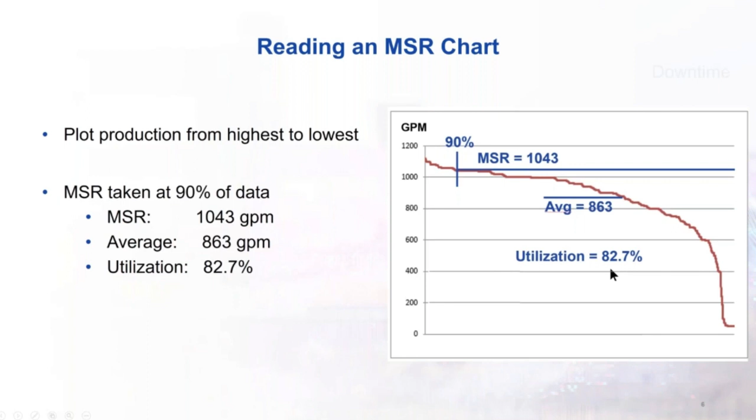And the goal is we're trying to make more production, so we need to take the part we haven't achieved and break it into two parts: there's a slowdown part and a downtime part. In this case, the slowdown part was 12.7% and the downtime was 4.6%. So as we come up with ideas for how we're going to increase production, we have to address one or the other of these to get the utilization up. You can get the utilization up by affecting those, or you can take the MSR up by doing a capital investment. So it's simple to do.

We've got a tool that will make the chart for you. You could build it by hand if you wanted, but for speed's sake and consistency, we have PARCview as a tool to do that.

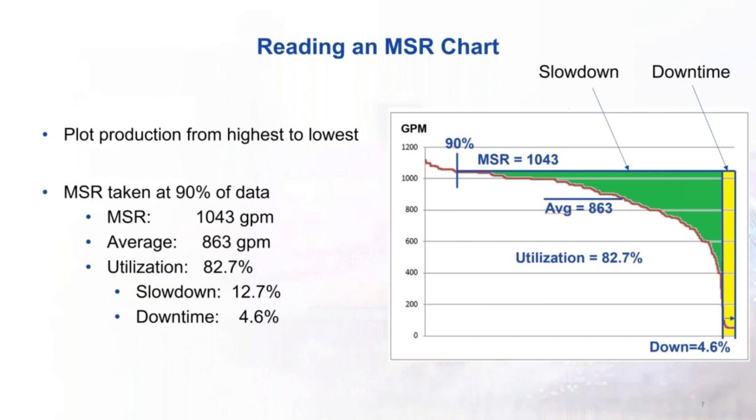So why use MSR? The goal is to increase the capacity of the entire plant, not just one unit operation. We need to identify the capability of each one of the units. Here I'm showing 8 units, and I'm showing the utilization level and the MSR for unit 3.

That's perhaps the slowest one in the plant. So we get the maximum rate and the utilization. Without using this technique, if you ask 3 people in the department, 3 different answers will come forth. You'll get it's amazing the range of what they believe they can do. You'll get one saying, oh yeah, on my grandson's birthday 3 years ago I came in at work and I ran 40, so the rate's 40.

And we just can't have those kind of guesses. We need to back it up with data, and the MSR chart provides that basis so each unit operation is evaluated the same way.

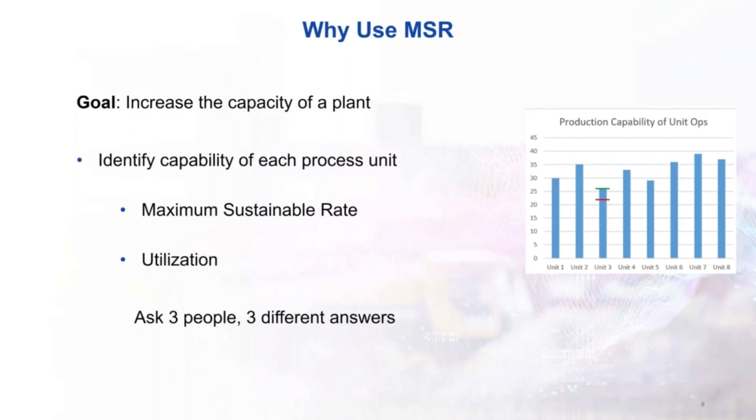So when we look at the utilization portion of it, how can we move the red bar up? We have slowdowns and we have shutdowns. Slowdowns, there are 4 possibilities. You have inventories low upstream, the people feeding you a feedstock, there isn't any, so you've got to slow down. Or the people downstream from you that you're providing feedstock to can't take it away, they're full up, and so you have to slow down. Or the utilities, the steam plant, the electrical, the delivery system, whatever, has problems getting you the resources you need. Those 3, you really can't do anything about yourself.

If you're trying to look at your process, the only one you can do anything about is if you have process problems. So under the slowdowns, we try to identify all the process problems you're having that's preventing you from getting that portion of the utilization.

Then on the downtime, there's 2 major types: planned and unplanned. And the unplanned downtime is either another unit got you, or you're responsible for that downtime. Again, the first 3 here, there's nothing you can do about those. That has to be under their purview.

But you can take the downtimes that you're experiencing and seeing through either preventive maintenance measures or something, if you can reduce your downtime. And that's to try to move the red one up.

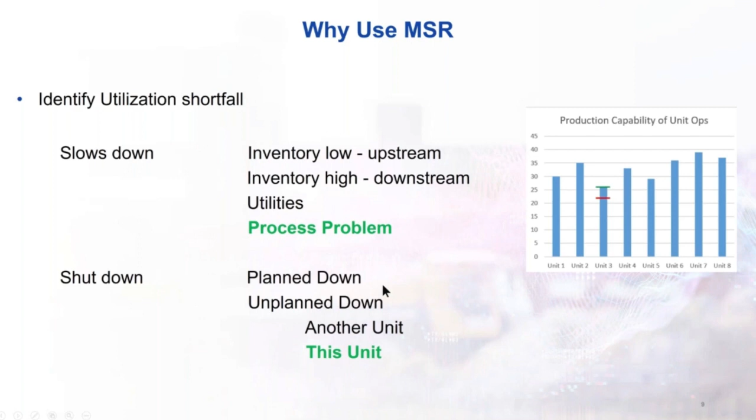So to take a look at how we go about doing that, what do we need to do the MSR analysis? We need the process unit production data for a year. We need somebody who knows something about the process, a subject matter expert, because when you start digging in and saying what can we do to move those up, it needs to really be somebody who knows the process.

If we're lucky, the plant will be recording reasons for slowdown and downtime, and we can use Pareto charts to organize those from top to bottom, what's the most important, what can we go after. And then you need tools that can do the identification of the downtime, help you find it, and you need tools to make sure that it's sustainable.

If you do move the bar, we need to be able to keep it there. We can't just do something and walk away. It's not going to stay there.

So what do you do with MSR data across multiple units? What you do is you find the limiting production, and I'm going to say it's unit 3 here, although the next 2, unit 5 and unit 1, are also on the low side, but unit 3 is what we're going to deal with.

And we need to find out, like I said before, what is causing low utilization? Is it slowdown? Is it downtime? And what are those components? We're trying to move the red bar up on that one.

But you can take another tack and ask, can the MSR be moved up? That's a whole different approach that says, can we spend capital? What can we do to take a physical limitation, spend money, and get that particular unit operation to run faster? So work on utilization and then work on moving the MSR.

And here's a gotcha. Sometimes we spend so much focus on one process unit that everybody's sure is the only thing standing in their way. You can spend a chunk of money to get the rate up, and all of a sudden they turn around and look, and another unit may not be far behind.

Like these three utilizations are low because they can't be much higher average than what the lowest average is. They can't run faster, there's no place to put it. So when you move this up, either through MSR or utilization, it doesn't necessarily mean the others' utilizations will move up.

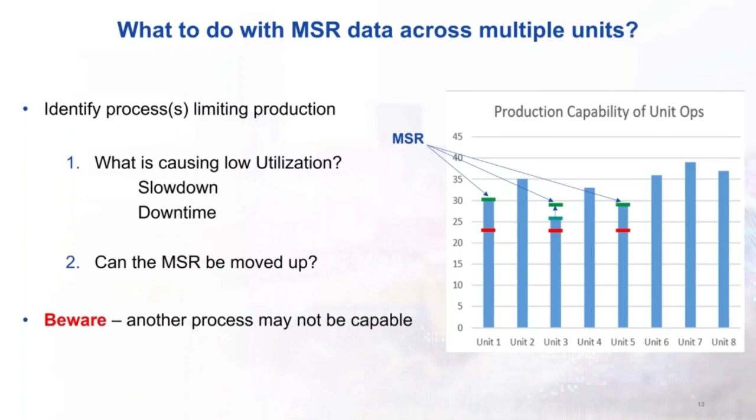So let's look at an MSR client use case. The easiest way is let's just show you a typical case. This is a paper mill, and the same question - they want to quantify what are the production bottlenecks in their system. That identify the bottleneck, identify a solution, implement the changes, and then sustain the benefits.

So it's not just let's go out and find out what's wrong, or what the limits are. We got to come up with a solution for how to solve that to get more production.

The dataPARC tools that we utilize to do this are data connectivity and transformation. The data connectivity is we need to be able to get data from any historian that's out there. I don't care whether it's a SQL server, whether it's a real-time historian, we need to be able to have access to the data, quality data.

And then there's data aggregation, and this people don't think of very much, but in these evaluations, we look at data over years. We're not looking at data over minutes or hours or days, we're looking at whole years worth of data. So if we're troubleshooting and trying to correlate things and look at them, we need to have access to data kind of at the speed of thought.

If you're chasing an idea down the road and all of a sudden you hit it and you wait 20 minutes to get data back, it's not conducive to solving the problem.

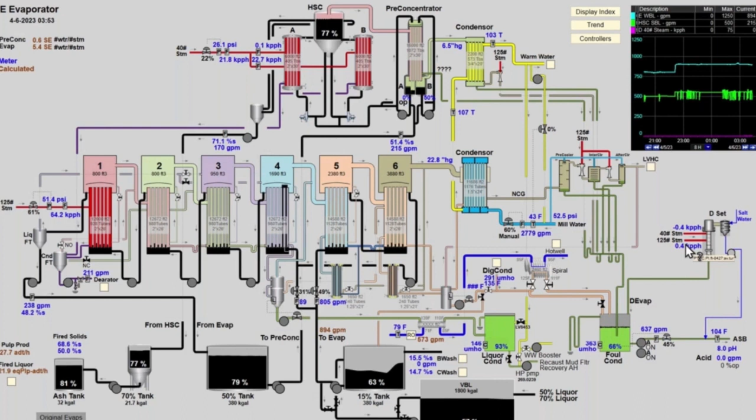So we're going to get the tag for the backup unit. There's only one - it's all panel mounted controllers, nothing in the DCS. It's an old unit. So we're going to get that tag, and then we're going to go in down, and first we're going to say we need daily averages.

We are dragging the tag over from the second unit of operation, the main one, and adding that to the display. I'm going to rearrange it here to 1250. Now, I like the trending at first - I just want to get a visual. Is there anything wrong with the data? Does it look like the tag's gone bad? That's just what I do before I actually go to the Excel sheet.

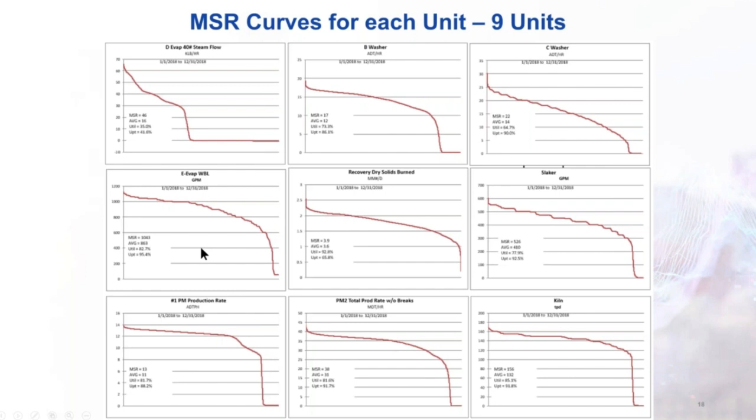This is the main unit - its utilization is 83%, it's got an MSR of 1043. And then there's the sort of backup unit or failover unit, and it's running a utilization of about 35%. So something changed that we didn't anticipate, because we weren't aware of the second unit. The current way they're running, they hardly ever run this - it's periodically, maybe every month or two they'll run it. But when they're really up to rate, that's why we went back to 2018.

Wait a minute, we can't ignore this - it's not just kind of sitting at the side, they were actually using it. It accounts for, that 35% accounts for about 16% of the production of these units here. So what do we do now? You could say, let's drop this - he's not a limitation, we'll keep running the old set here, the old one, and it's got plenty of production.

But that's not what we do when you go into an operation ideas - you want to eliminate equipment, you don't want to have it end up being used as a crutch if you're not careful, which in this case is a little bit what happened. So we're going to take this on and say we're going to get rid of this unit, and now we need to make the main unit run fast enough to take care of that. It's a bit of a tall task. So one of the things we need to do is break down this utilization here into things we can identify that we think the problem is. And this downtime, I would like to split.

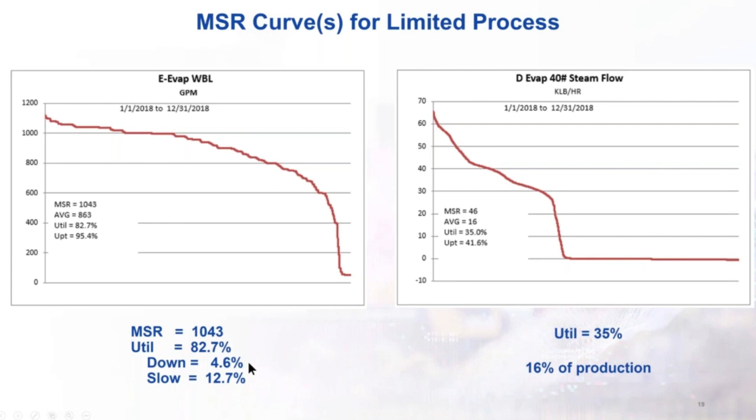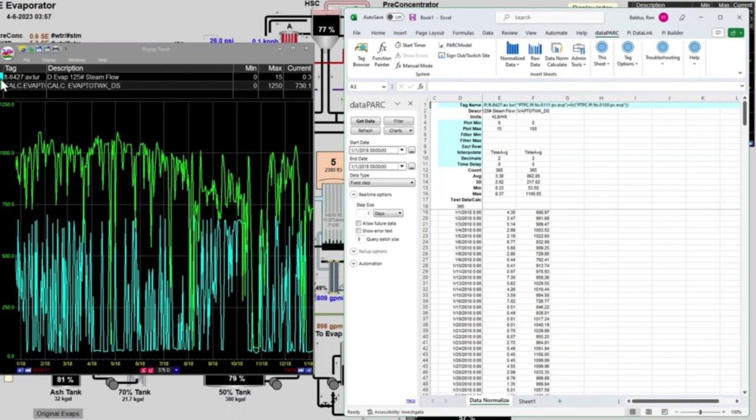So we're going to go back to our display of the trend on the left, and we're going to take a look. They said the downtime was about October or November. So let's get rid of the old unit and just look at the main unit. So that's about October, I think.

Let's zoom in on that, and we're going to figure out how many days they were down. So I zoomed in on it. It's daily average. I'm going to right click and go to time type of hour because I want a little more resolution on it, and then find out how much time they were down. It's the gap between there. So I'm going to highlight that.

In dataPARC, if you highlight the trend and drag it down at the bottom, it gives you about how much time that span is. If you look down, it's about 9 days, a little over 9 days. So of the downtime that we have, the 4.6%, we've just proved to ourselves that the downtime is 9 days.

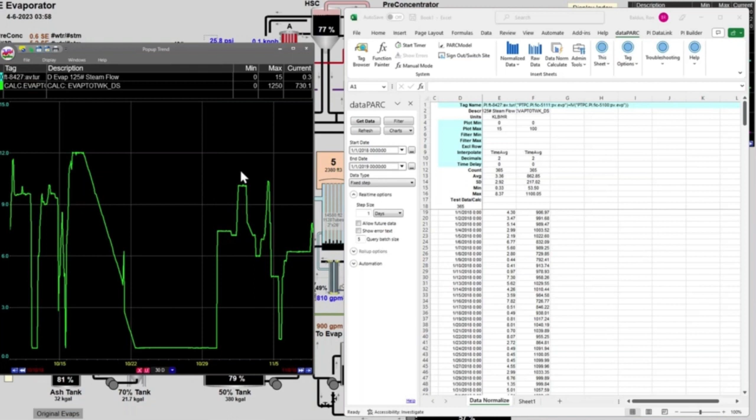So I'm going to go back here and put those back up to the year data in case we need it later.

So let's put this up, we're just going to sequentially show how we step through the problem. The downtime on the main unit was 4.6%. We went in and looked back and saw that it was down for 9 days, which is 2.5% of plan down. There's really nothing we can do about the plan down. That's somebody else's decision because it's generally a full plant down. They're doing it for other reasons. So we've only got, what do we have, 2.1% downtime that we might be able to do something with.

And there's no way that 2.1% downtime is totally the responsibility of this unit. There's 8 other units in the plant, 7 that if one of those goes down, it could take it down. So there's 2.1%, and there's probably 1% of that, I doubt it's even 1, that's responsible to this one. So what I'm trying to do is come out, I've got a column over here. Where am I going to get capacity to balance this out, where we cover the shutdown of the old unit, and we need more capacity to move forward since we're going to be the limiting factor.

So then we go to the next, the utilization. We've talked about downtime, we're saying we can't get anything from that. We go to the main unit, and our old unit's going to shut down, so we're not going to pay any attention to it, other than we lose 16% capacity.

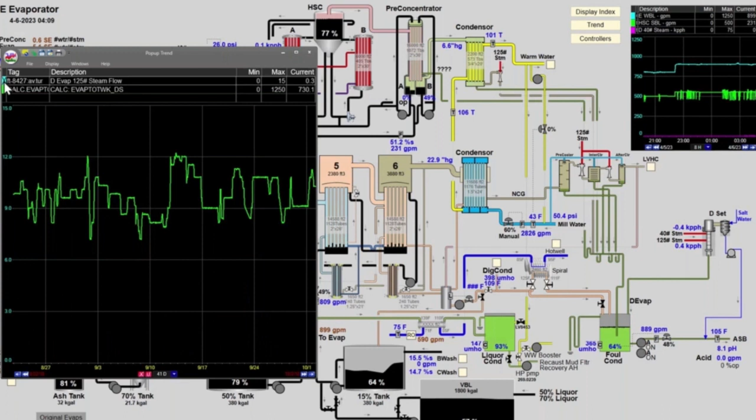If you blow him up and take a look, we've got the blue one's the old unit and the green one's the main unit. So what we want to know is, at the time it's low, if you look right in there, you see the green unit's low, that's the main unit. When they shut down the old unit, the main unit can pop up and run fine. So all those turndowns, all those slowdowns, it's not that the unit's having a problem at all. It's that they kind of just base load the old unit, it's old. They don't have hardly any controls over it, so they just base load it.

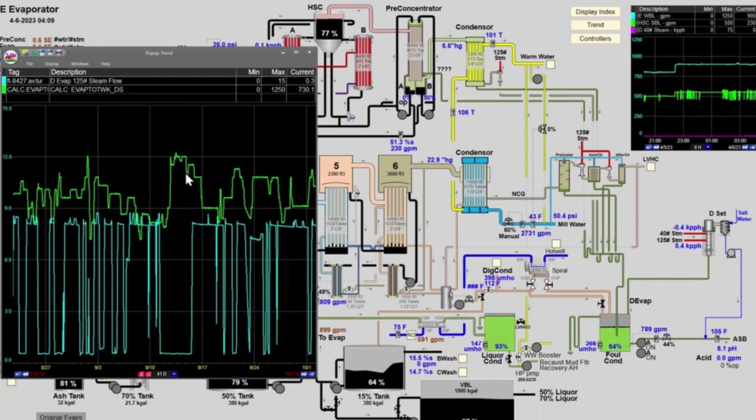So just to check this out, I'm going to go put the gas pedal on. The gas pedal is the pressure on the main unit. Let's see what the gas pedal was doing.

Well, they weren't even running at full. Normally these guys run flat out. And you can see when the old unit went down, they just put the gas pedal down and the main unit ran faster. So this 9% down didn't have anything to do with it, this time after time you can go through this and look at it. This didn't have anything to do with the reduction. It wasn't his inability to process and make product. It was that he was taking all the swings and letting the old unit run fairly base loaded.

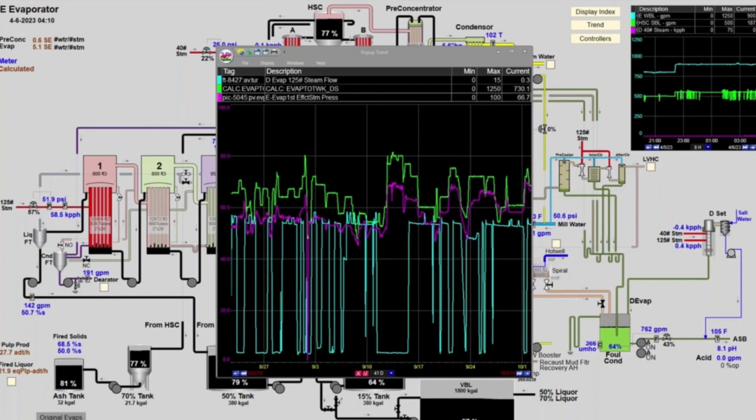So we can get the 9% from an SME point of view, and from looking at the data, that's not going to be a problem. Shut down the old one, lose 16%, get 9%, we're 7% short. So we have to go up to the MSR.

And this is where, if you have a backup unit or a unit that you can just kick on anytime you want, you tend to not invest in maintenance on either of the units because you can swing back and forth. And the main unit, the big one, had a problem and it had been around for years. I look back, I had 12, 14 years of data, and it's been sick for that long. One particular part of the process is sick, and it would require maintenance money to go after it. Well, who's going to spend maintenance money if you can just turn on this old unit? Although now you're having to keep repairs on the old unit, it just kind of gets lost in the shuffle, little repairs here and there, and you got to maintain it.

So we, as an SME, looked at the issue they were having, the part that was broken, and said, what could we do if that was fixed? Well, hey, we can get 17% capacity is the belief. And then we were able to run some tests around it just to validate what was really happening, and did that fit with what our thinking was, and it did. So we sort of put our heart on the line and said you're going to get 17% capacity if you fix that, and overall then we're going to get 10% capacity. So if you fix this issue and shut down the old unit, you actually pick up the utilization of the main unit, and we're going to end up actually 10% more capacity.

So what's the outcome of this and the results from a customer perspective? Their benefits were identified and implemented for $1.1 million was the investment. We got an incremental capacity of 10%. Actually, I think it's about like 12 or 13%, but we achieved what we said we were going after.

The old unit is down. Now we got to make sure it stays down, and that's where the sustainability - we got to make sure that happens. We reduced the steam by 15%. That was, we're after production, but by fixing the unit for many years, they were paying a large steam penalty, and the steam penalty was actually $1.6 million per year.

So without requiring the capacity increase to pay for this, just the energy savings alone paid for the fix.

Operational flexibility - now that we have capacity, it may be that from the other units balancing around here, that we only get 5% of that capacity that we need. We can increase the production of the facility 5% over what it was in 2018, which is one of their best years.

So we may have some flexibility in that to use that capacity in another way. If an upstream or downstream unit from us is having problems, we may be able to relax the requirements of the feedstock or increase the requirements of the product stock downstream if that helps them make more production. So we have the ability to maybe help some other people solve their problems.

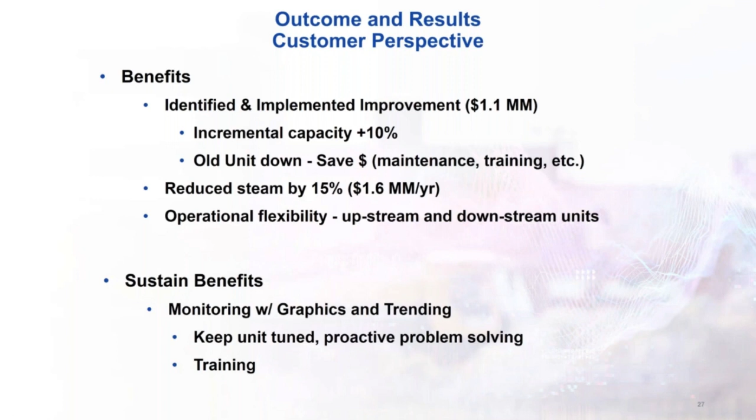So that's MSR from beginning, implementation, and follow-up. Are there any questions?

Well, first, Ron, I just want to thank you for sharing the story. That was great. Like I said, when you first told me the story 6 months ago or so, it sounded like a good one, and it seems like you guys had some fun with this project. Is that right?

Yeah, when you can help somebody and everything goes the right direction, and you make the process simpler rather than more complicated, it doesn't always work out that way.

One question I had - it looked like there's quite a few iterations as you were interrogating the data, and you needed that data to come back at the speed of thought. That probably didn't work out just the first time. Can you speak to some of the main challenges that you faced in that iterative process?

That's a good question. One thing that surprised us when we started down the path was that we had two units to think of, and it's never clear till afterwards. In hindsight, you'd say, well, duh, we should have known that was probably happening between the two units, but you tend to chase a few things down the road before you key in on the problem. So we make it look like it was one easy step, but it was much different than that. You chase a couple other things to figure out how come the process is having a problem, and then it just kind of coalesces, and you see the truth of the matter is pretty simple.